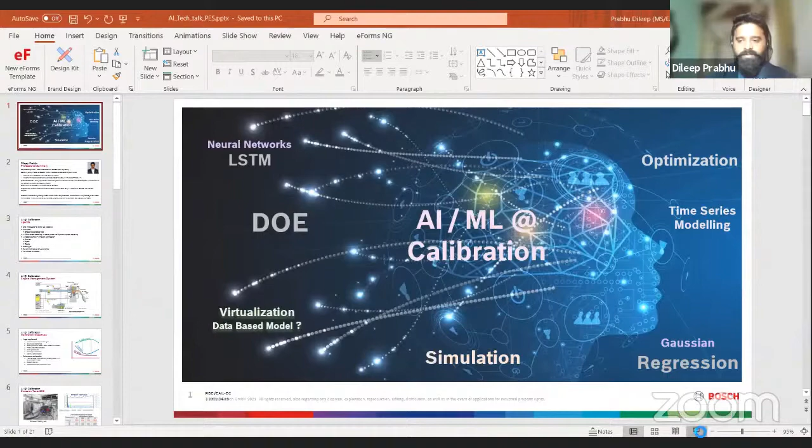Hello, thank you everyone for coming here, and thank you for my introduction. So hope everyone can see and hear clearly. Yes, we can see and hear you clearly. Okay. Yes, and we can see your screen just as well. Okay. So good morning everyone for coming here on Sunday and making some time.

And today I want to show specifically a method. We normally hear a lot about AI, artificial intelligence, machine learning, deep learning, and how it is going to help us in optimizing calibration zones. I mainly want to touch upon the topic that artificial intelligence is not just for digital marketing or face recognition and automated cars alone, but it is also useful for solving quite a lot of engineering problems, which are not normally explored by tech geeks.

So we started an initiative of looking into how we can solve our conventional optimization problem and calibration problem using newer methods. We started working on these ideas some 2 years before. And now we reached a stage where we identified the problems and the areas in optimization and calibration problems, and how to solve them with these methods.

So maybe I'll skip the introduction part, it is already discussed. Let's go through a brief agenda of what we talk about today, so that you know what is coming up next and how the talk is structured. I want to give a brief introduction about EMS, since I'm not sure everybody here is working full time on the tuning area; you might be working on design objectives or the chassis and so on. So I thought of giving a very small brief introduction.

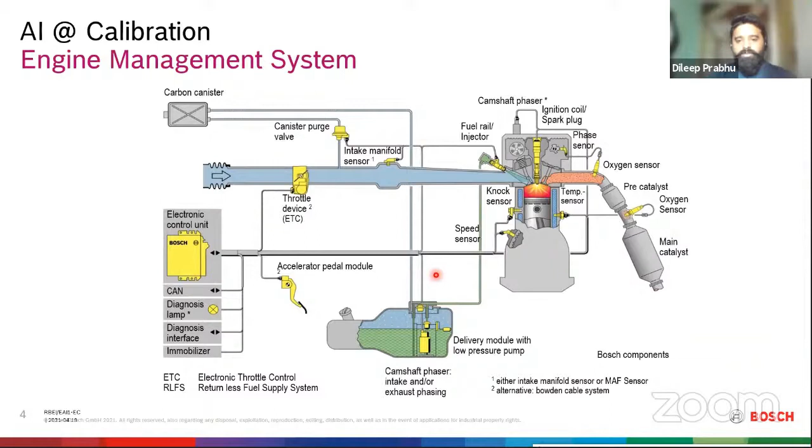So maybe we will look into the next slide, where there is always an optimization problem. Just a second. So here, there are two main objectives of any tuning that we do, or what we call calibration of a new engine. One is called legal requirement. The other would be performance and comfort.

Normally the legal requirement would be enforced by a government authority like ARAI and so on. And we have to satisfy these points in order to sell our vehicle. That includes the emission test, idle test in fields, and OBD requirements like onboard diagnosis, where it should be able to self-diagnose its catalyst and exhaust aftertreatment.

It also has to ensure that the vehicle is able to deliver lower emissions for a specified distance, say 150,000 kilometers. Until then the car should be able to self-diagnose itself, and if there is any issue in terms of emissions, it should throw a MIL lamp, and other legal requirements like evaporative emissions and so on. And the other part of the trade-off is performance and comfort.

As you know, there are some cars with very good drivability and very good performance, but it always takes a toll with reduced fuel economy. If you see the graph on the right, the best fuel economy point means you're trying to get more out of the gasoline that we consume, but you don't always get very good comfort and drivability, because it cannot be very aggressive.

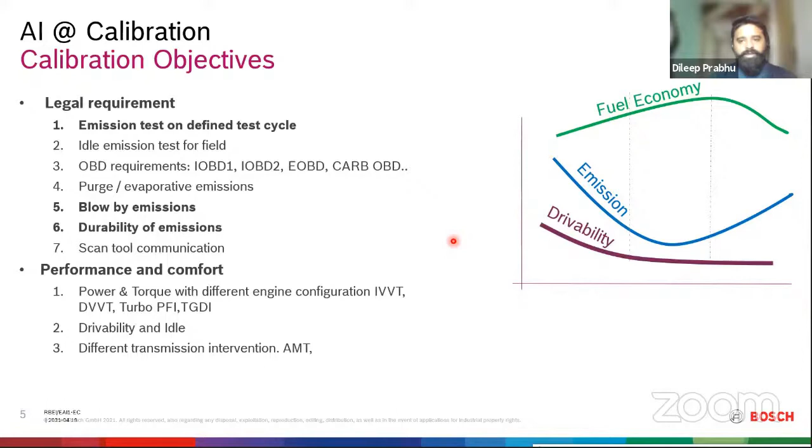So in this kind of scenario, just a second. So this is one typical example of an emission test. I just want to show what the complexity in emission testing is, and also what trend is happening right now, where we are moving from testing in the lab towards testing on the road and more real driving conditions.

So this is a typical example where the vehicle is mounted on a chassis dyno, the pollutant gases are measured every second, and the vehicle is driven on a test cycle for around 20 minutes. The cycle is the MIDC, what we call the modified Indian driving cycle. This is an NEDC cycle, but in India what we have is the MIDC cycle.

That means each and every vehicle that we release on the road has to undergo this test, and there is also a limit specified by the government that the total emissions accumulated by the end of this cycle should not exceed a certain value. All right. And there are three different pollutants which are normally harmful, which are byproducts of combustion. These limits are all mentioned by the authorities, in milligrams per kilometer and so on.

So this is one of the main objectives, or challenges, that we have after engine tuning and drivability. The last activity is emission optimization, right? After we tune everything, chassis mostly done by the OEM, we take care of emission calibration, overall engine performance and tuning calibration. After drivability calibration we come to emissions, and we see a lot of increase in emission values due to aggressiveness, either by the driver, the pedal maps, the way the drivability is, or a lot of different factors.

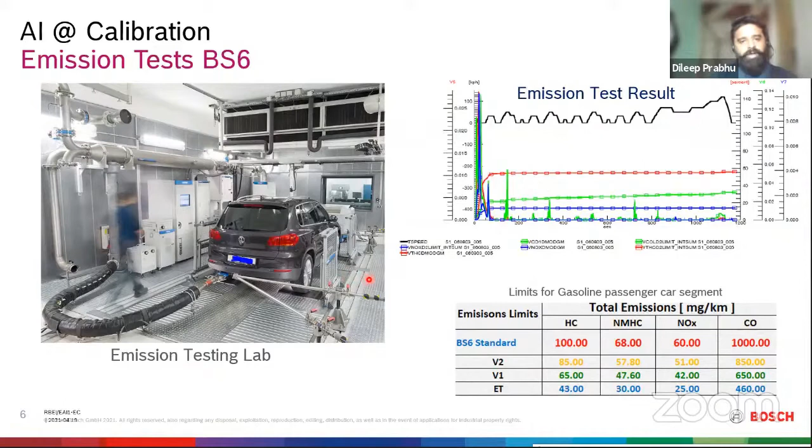Going further, you might also have heard from Europe and the US the term real drive emissions, which is coming in BS6.2, as they call it stage 2. In the previous slide you saw that the method so far is that emission values are measured from the vehicle in a test cell, a closed environment simulating something similar to road conditions. But that is not enough, because of traffic conditions, driver variations and a lot of other factors. The steady state test was not really close. So that's where the trend is moving towards on-road conditions.

That means the whole emission lab facility is running just behind the car, connected to the exhaust, where we will be able to tell whether the car is polluting more or is under the legal limits. And there are different conditions put by the legal authority, that the vehicle has to be driven in equal share in urban, rural, motorway, and so on.

So this is creating a lot of challenge in tuning the vehicle to satisfy all the requirements, like fuel economy, better drivability, and emissions. This is costing a lot; a single piece of equipment costs more than 2 crores, and it's not really easy to swap between vehicles. OEMs will have a number of variants and vehicles that have to be tested.

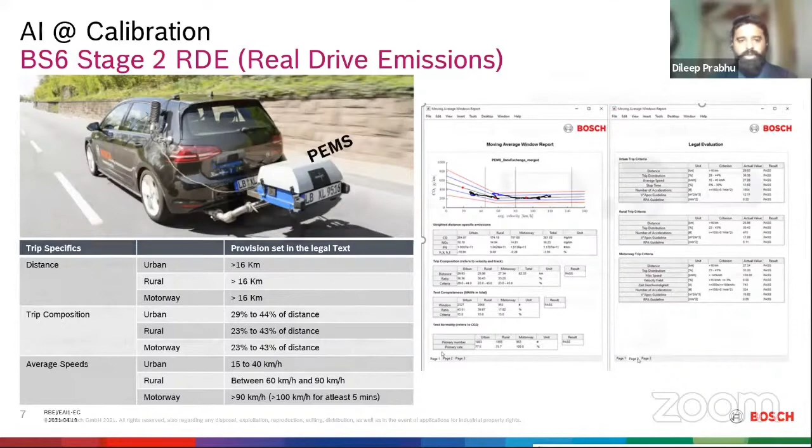So in order to cater to this problem, we looked into the whole emission problem we are facing today and how it could be done differently with newer methods. As we discussed in the previous slides, we are moving towards very stringent emission norms like BS6, and RDE, real drive emissions, is coming, and they are also enforcing CAFE norms and so on. And there's also robustness on the real driving cycle.

There is a necessity because the authority can test the vehicle anytime after it is released, and they'll look if the values are still within the limits and so on. So we have to ensure that robustness is quite good. That's not just for the OEM to get the certification from the authority, but also for the vehicles running on the road to meet all the legal values.

And like you mentioned, the facility cost is very high. Such a facility, either stationary or on the road, like we have mentioned here, each emission test costs 1 lakh rupees per test. And there will typically be 50 tests in a typical project in order to tune for meeting the legal values. And there is also high load.

As you see, the number of vehicles released last year is quite high in terms of number of variants. A lot of different OEMs are coming in because it's an untapped market, and the small segment vehicles are booming here in India. And there are so many variants and vehicle demand coming, especially for tuning,

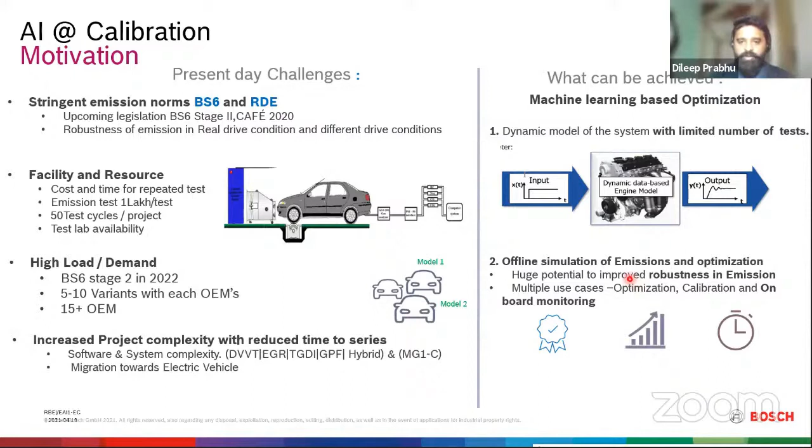Okay, so maybe we will go on to another example here. This is what we are calling steady state engine dyno calibration. That means the engine will be mounted on an engine dyno, and the target is to optimize the points for the lowest consumption. At the same time, the pollutant values from the engine should also be lower, along with noise, stability, exhaust temperature, and so on. The primary objective would be reduced CO2 and also reduced emission values.

But there are different operating points at which an engine can run. By operating points, I mean that an engine can run from 1000 RPM to 6000 RPM typically. And there are different strategies by which it could be tuned. What is the ignition angle that you want to optimize? What is the VVT, variable valve timing, you want to select, and so on.

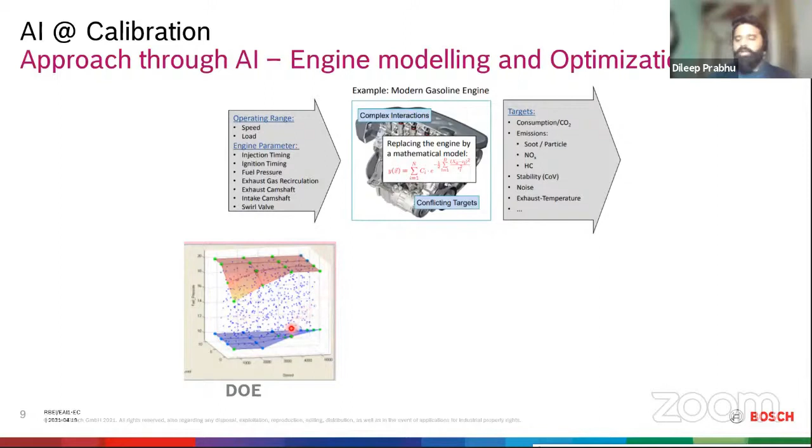And this approach is called full factorial approach, but not measuring all 30,000 points, instead measuring only around 1,000 points, which covers the entire operating range of the engine, and then use this data to model the behavior of the engine. That means using these DOE points alone, we're going to represent the complete engine operating condition. We can also consider that as a plant model or engine model.

But here there is no physical equations behind it. It's not like a GT-SUITE model or some kind of one-dimensional model where we specify how many cylinders, the size of each cylinder, the power output, friction, and so on. Instead, with this method we directly measure everything from the engine, and then we model all the points to a model which could represent an engine, which would be used further for optimizing the maps and curves inside the ECUs.

Okay, so I also want to touch here that the model we used here is called Gaussian regression. This is one of the famous models in regression technique. Maybe in coming slides, we'll see which part of artificial intelligence we are using here to make this model, and what its significance, relevance, and potential further are in solving the optimizations and so on.

So having this model, which is built on data, called a data-based model, is very useful in terms of optimization. That means the targets which we saw here, it is possible to define these targets in an optimization tool, saying, look, I want to get the map values, or I want to identify the best injection time, best ignition time, which satisfies my lowest consumption and emission values. So this is a typical optimization problem.

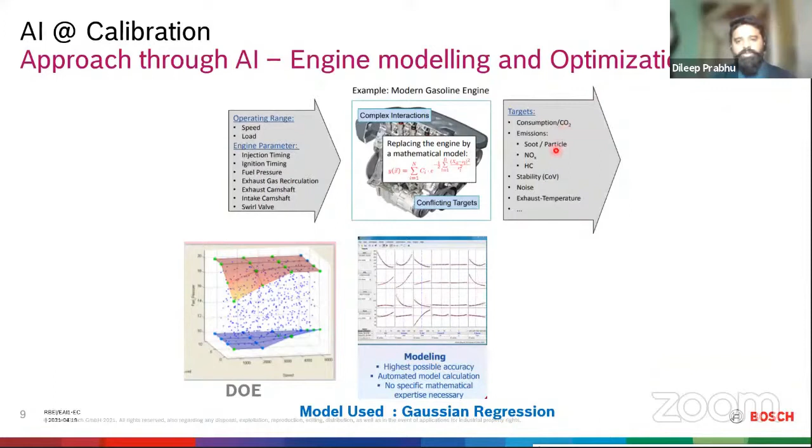And the model which we did is a function. We call the function and we define the constraints, these are all the function constraints which I want to solve, and this is the model. So the output would be that we directly get the injection time values, ignition, EGR rate, and exhaust valve and intake valve positions. So this method saves quite a lot of time, and it's also very handy for optimizing every time you decide to change a target and so on.

But on a series engine, this is legally normally a problem where we might have to choose different operating points, which produce lesser emissions and also lesser torque, because an operating point which is very optimal in terms of torque is not always optimal in terms of emissions. So there is some back and forth optimization. Instead of going back to the dyno or into the sheet to find the other point, this optimizer comes really handy and powerful in generating all the maps at the same time.

So this is one of the approaches or techniques. It's quite powerful, and it's very useful in terms of engine dyno calibration or optimizing, tuning the engine alone in steady state conditions. And yeah, this we call a steady state.

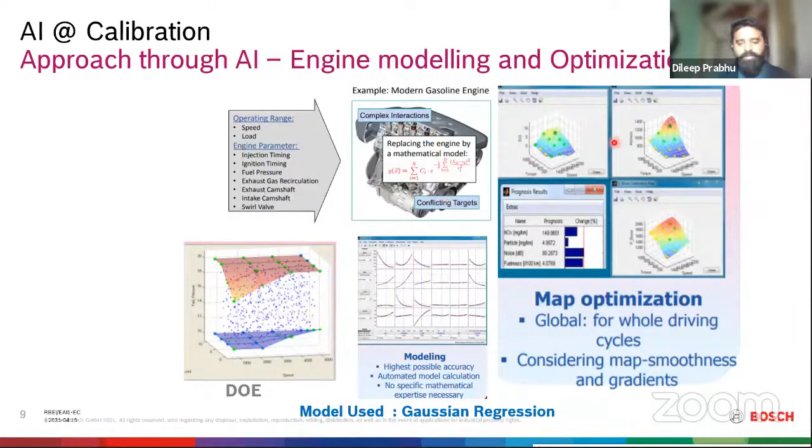But in real drive condition, the vehicle will be driven continuously where operating points are changing over time. So in real drive conditions the data which we record is always with respect to time. So we call that a time-based optimization problem, or time-dependent variables, right? In case of time-dependent variables, it is not quite possible to model like we did in the previous slides; a regression model would not work.

So we have to treat the entire measurement as in dynamic condition, and we need to learn the behavior of inputs and outputs and model them. A traditional example is if you want to make a plant model which produces the output with respect to input, with respect to time, we need something called a transfer function.

Those of you who are aware of simulation might have heard that in MATLAB Simulink there's one such method that we use to model a system. Normally what is used is called a transfer function, or a system identification toolbox, in order to identify what kind of system it is, and if you give an input, how the output would be, and after how much time it realizes that output.

But doing such a model in a mathematical way like MATLAB or GT-SUITE calls for a very high number of parameters. We need to specify all the mechanical dimensions of the engine, some CFD will also come in, and we also need to know the coefficient of discharge, friction coefficients, and a lot of things which we do not know. All we have is an engine mounted on a vehicle that I can drive, but I do not know it theoretically.

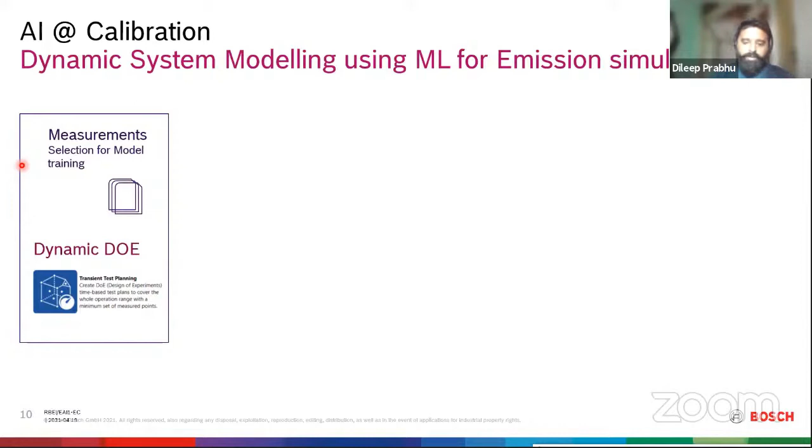One normal technique is to find out what is the normal frequency of operating range and frequency of dynamic range, the dynamic conditions at which the driver drives. One would be aggressive, one would be normal, I mean mild, one would be an urban driving pattern, one could be rural, and so on. Yeah, so that is about the DOE. So once we have this DOE, once we identify how the measurement should be done.

So the second important feature here is the feature identification itself. That means we have to identify what are the inputs that we need to capture and what should be the output of the model. Okay, so suppose in this example, we were looking into how do I model my emission parameters in real driving conditions, meaning in dynamic conditions.

So in emissions, if you see, there are three pollutants which normally have to be optimized, which are THC, CO, and NOx. Out of these three, we are just giving one as an example, which is nitrogen oxides, and we have the different inputs like speed, load, lambda, ignition angle, and so on. So identifying these relations, what are the inputs and outputs, is the second key step.

Once we have enough measurements, and we know what are the features, the inputs and outputs which my model is going to learn, then the third step would be selecting a model or tuning a model. Okay, so typically in AI applications, there are lots of different models available. In the next slide, we will see where this model comes in, or under a broad category, what this model is that we are talking about.

But maybe you can just think about this: for time varying or dynamic conditions, there are models which are very proven, state of the art algorithms developed by Google. One of them was TensorFlow, and all other things are wrappers around this library. This has mostly been used for image recognition problems and speech recognition problems, and even in the Google search engine, if you type a word, sentence completion, all of that has been done with this package called TensorFlow, especially neural networks, and there are lots of different variations of neural networks.

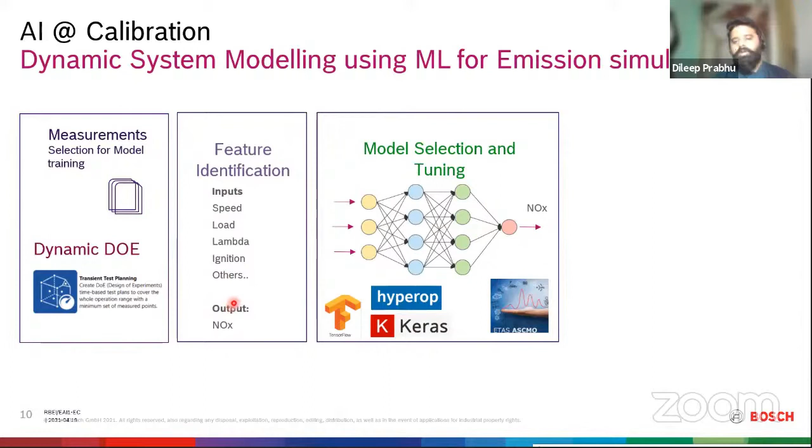So here what we are trying to look at is how this neural network can be used to model an engine application. Emission is one problem, but it doesn't necessarily have to be this; you can think of modeling anything, like trying to model exhaust temperatures just by the thermocouple values and operating inputs. You would be able to model the exhaust temperatures very accurately, up to 95%, without using the sensor later. And one can think of having such a model representing the entire vehicle dynamics also. So the possibilities are endless. There are a lot of applications that we can think of.

So once the model is done, what is next? So there is a model running on my desk, which is going to predict what your emissions coming out of your vehicle would be for any input conditions. As I mentioned, there are two typical algorithms used for solving any of these problems, especially in gasoline or combustion engine applications.

One of them is called recurrent neural network, and inside recurrent neural network, there is a sub-version of the algorithm called LSTM, which stands for long short-term memory, and this is from the TensorFlow package. This is an open source library, and one could use it for any problem from Python. It's pretty easily deployable. And there's also another tool from ETAS which handles all of them, everything in one package, which can be used for modeling, optimization, and so on.

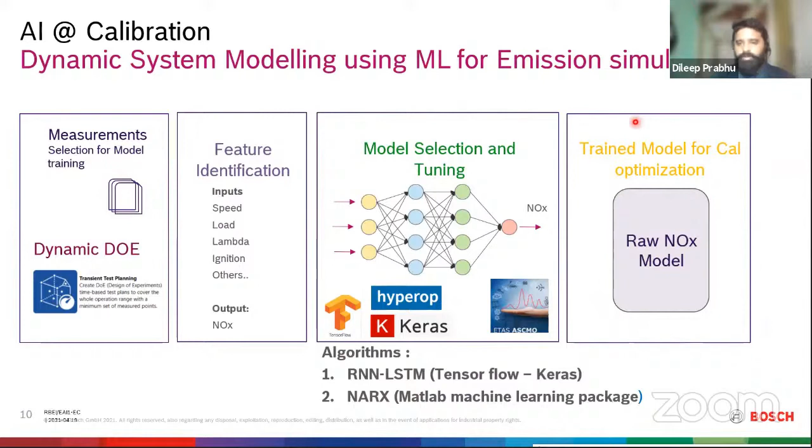All right, so maybe next we will slightly touch upon which category of artificial intelligence we are talking about here. So the general term that we always see everywhere in advertisements is something called general AI. Narrow or weak AI is what we have today, which we are using for solving our problems. But general AI, which is much more advanced, is kind of consciousness, things like a fully intelligent robot interacting with us. So that is not what we are talking about.

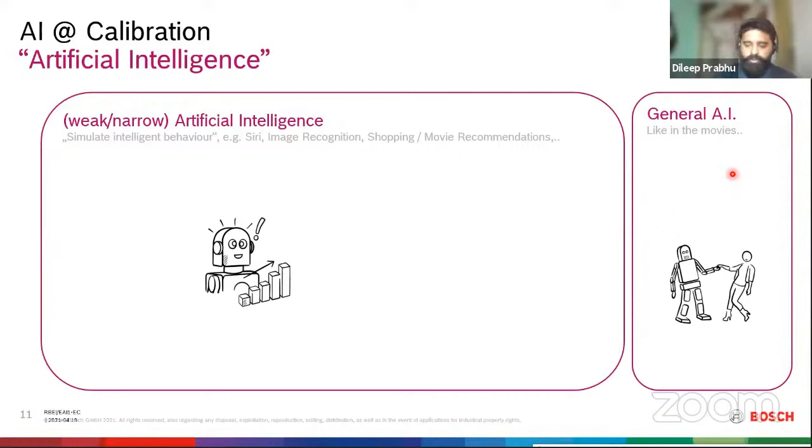And when we see narrow AI or weak AI, there is another category that comes in called machine learning. And inside machine learning, there are different approaches, different methods called regression, classification, and so on. So the first example which we saw, solving the engine dyno problem or reducing the number of points on an engine dyno, is actually using this algorithm inside a machine learning technique.

Okay, so this is mostly used for steady state measurements, which are not time dependent measurements, if you want to model them with very few points and for further usage in optimization. So then we just need to know a thing called regression, and there are different versions, different algorithms available. One of them that we use is Gaussian regression.

And what about the time dependent variables? What if I don't have access to a steady state dyno and I just have a vehicle on road, and I want to capture those measurements and still model them like steady state? Then we need to work on these time dependent variables, where we have to go for the help of a neural network, which is a bit more complex than machine learning. But there are algorithms which are specifically made for solving each application.

Inside that, like you mentioned in the previous slide, this is one of the state of the art proven algorithms which comes in handy for solving any time dependent variable. This is also called a recurrent neural network. Inside artificial intelligence is machine learning, and the sub-classification of machine learning is deep learning, where we use neural networks for learning the weights for representing a plant. So this is an overview of what part of AI is used.

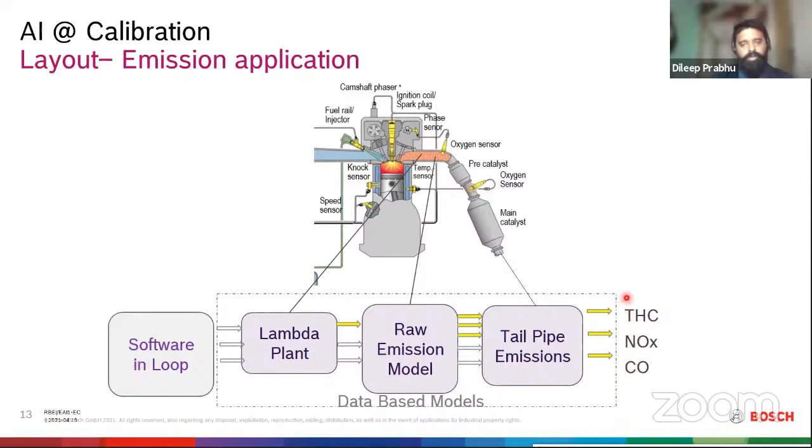And there are subsequent models which are connected, and they are all done purely by data-based approaches. They are connected in series in such a way that if we provide new measurements, we would be able to see the emission values by the end of the cycle or end of the measurement.

And this is also about the algorithm. If you are further interested and want to explore this data-based approach, you can just go ahead and Google this algorithm to know how this method works. And there are also open source libraries, like I mentioned. One can download directly from the links, probably in Python, try modeling, and see very good results.

And of course, there are challenges in this approach. It's not that the data-based model is always easier than physical models. So I just want to touch on a few challenges here. One of the main challenges is data availability. Like we discussed before, this does not have any physical meaning for the algorithms, which don't understand anything. So data in, data out, which means garbage in, garbage out. So we need really clean data in order to make any sense out of it.

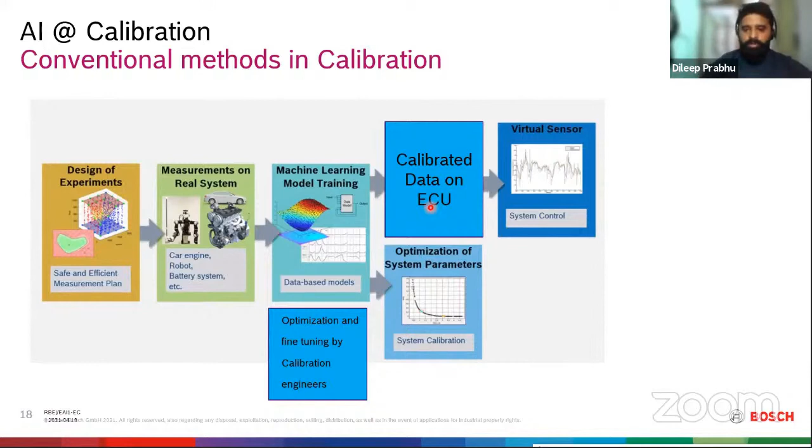But there is also a trend we are going through right now: what if we can directly upload these machine learning models onto the ECU, where no optimization is required, where a calibration engineer does not need to say what the best operating points are for calculating things like ignition timing and injection angle. Instead, the whole machine learning model runs directly on the ECU. So the ECU at any point in time can calculate the best possible operating points for the given input condition by itself. It does not need somebody tuning the engine to tell it the best operating points. The ECU itself is intelligent enough to know the best possible operating points at which it can run.

So that is the next trend, and we already have some software versions available, with some testing ongoing, where these machine learning models are directly deployed on the ECU and are able to predict things by themselves. There are a lot of different applications for this, mostly where it is complex and difficult to model using a physical model. That is a very good candidate application.

Currently some research is going on, and also some testing is ongoing on virtual sensors. That means without using a sensor we are able to model it, and this model sits on the ECU to predict the output. So we do not need that sensor anymore. We can just eliminate a sensor, and the ECU can identify the value by itself.

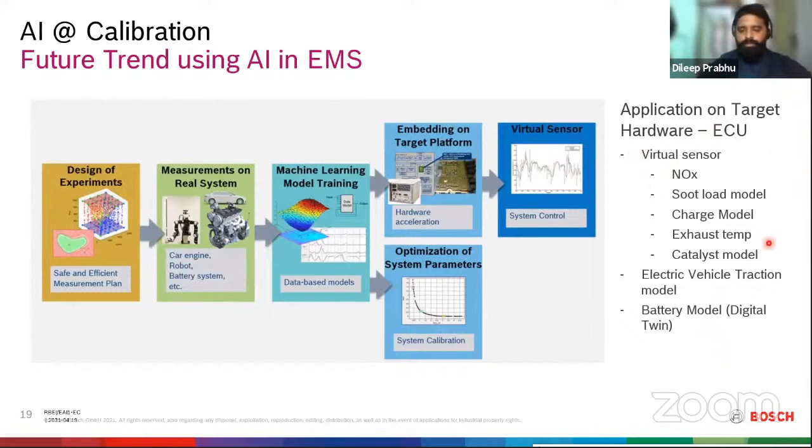And the last topic I want to cover here is one big project that Bosch has been working on for a few years, and now it's ready, and testing is ongoing in Europe and with other OEMs outside Europe. The project is basically identifying the robustness in terms of emission output when we drive the vehicle in different traffic conditions and different environmental conditions.

All right. So like we mentioned in the beginning, we have an emission requirement. That means we have to ensure that the pollutants are well within the limit in real driving conditions. That is RDE, as we mentioned. So this vehicle has to be driven in all the different conditions with different drivers, different routes, different traffic, altitude, and so on. This is way too expensive and time consuming, and the equipment itself does not support measuring in all these conditions.

So the approach tried by Bosch is that the entire vehicle in terms of powertrain, chassis, and multi-ECU communication, everything is virtually modeled, and the entire model is running on the computer. If we just provide the route and traffic information, say on Google Maps, that you want to drive a vehicle from A to B on a certain day in certain conditions, we would be able to tell the cumulative emission values at the end of the trip, nearly as accurate as what we measure inside the lab facility.